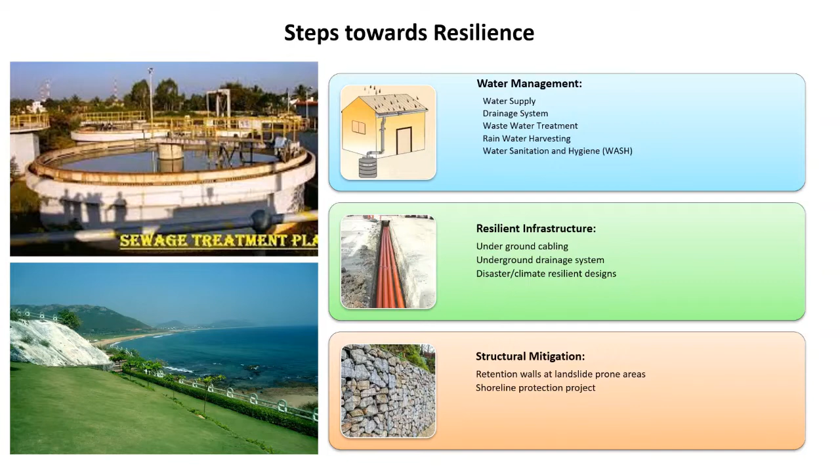The UNDP, GOI, and USAID projects were implemented mainly focusing on institutional strengthening, disaster preparedness and mitigation, climate risk management, and community resilience. Under these projects, hazard risk and vulnerability assessment studies were conducted.

Disaster management plans have been prepared and capacity building programs are also conducted. The City Operations Centre, established under the Smart City Mission, plays a key role in emergency management and supports the administration in real-time risk assessment and quick decision-making. The Engineering section, through Public Works and the World Bank's Disaster Recovery Project, covers post-disaster construction, recovery, and retrofitting activities.

We are happy to announce that in our city we have been able to maintain more than 30% green cover, in association with relevant departments like the Department of Horticulture, Forestry, Industries, NGOs, and the community, through various plantation and parks development.

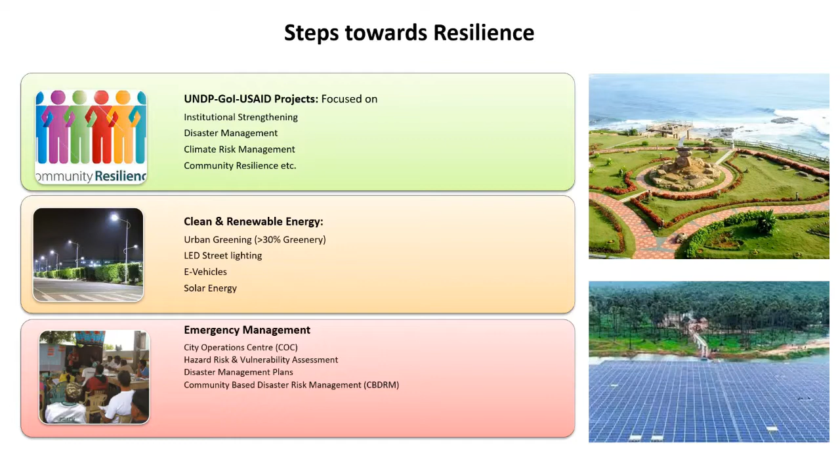Other prominent steps taken towards making the city climate resilient include LED street lighting as a model of energy conservation and efficiency, and e-vehicles deployed to reduce carbon footprint. Solar energy generation units are established on rooftops, parking spaces, etc. In fact, India's first floating solar plant was constructed at Mudasarlova Reservoir of Vishakhapatnam city.

For long-term sustainability of UNDP GOI projects, activities and city initiatives, the Sustainability and Resilience Program has been initiated by establishing a Sustainability and Resilience Unit under the Commissioner GVMC, Andhra Pradesh. The SRP and SRU will extend support to the entire state of Andhra Pradesh in association with national and international entities.

Objectives of SRP and SRU are to achieve comprehensive, sustainable and resilient development of Vishakhapatnam city, to support the state government in achieving sustainable development goals, institutional strengthening, and promoting better governance in the city, and to implement policies, frameworks and best practices laid out by the government.

The Sustainability and Resilience Unit works directly through its four cells: environmental cell, climate cell, disaster management cell, and human resource development cell. Its components include planning and mainstreaming disaster risk reduction and climate change adaptation, implementation of sustainable development goals, environment management, climate risk management, disaster management, human resource development, research and innovation, development of an urban observatory, knowledge management, partnership, collaboration and convergence.

Climate cell activities include implementation of the climate change action plan, promotion of green growth, renewable and clean energy, climate change adaptation, awareness programs, health and well-being, and nature-based solutions.

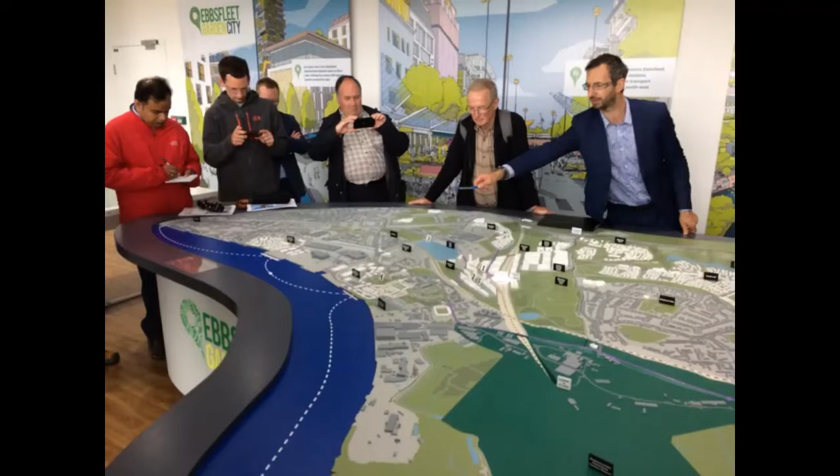They state in that implementation plan, waterscapes and green corridors are to be a defining feature of Ebbsfleet's streets, parks, and neighborhoods. In summary, the consortia developed and helped implement innovative strategies for managing urban water and flood risk as part of wider integrated urban planning to achieve environmental enhancement, urban renewal, and urban growth, in which the multiple co-benefits of blue-green cities can be both delivered and rigorously evaluated.

In 2020, the University of Nottingham appointed Dr. Liberty Mbanye to lead a new blue-green initiative in Nigeria, designed to find sustainable solutions to future flood and water resilience issues in Abuja. Dr. Mbanye will now tell you what happened next. Over to you, Dr. Mbanye.

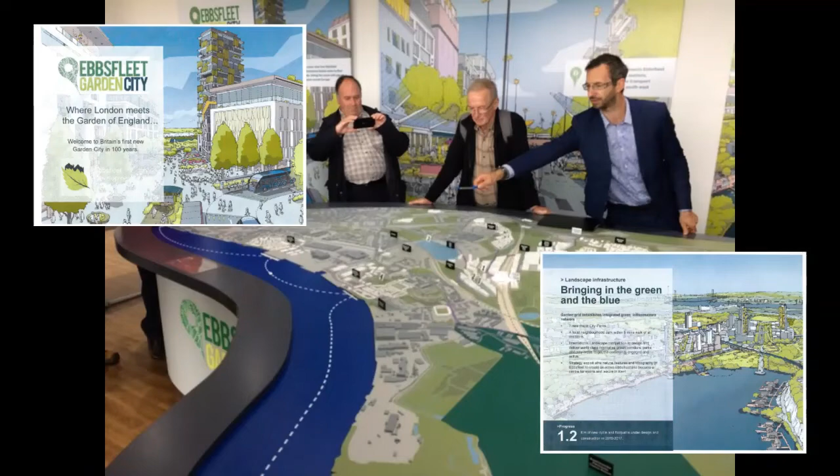Nigeria is building cities for the future like Abuja, which is justifiably referred to as heart of Nigeria, the center of unity, and whose master planning and philosophy envisages the nation's capital as providing a green, livable urban environment fit for the 21st century.

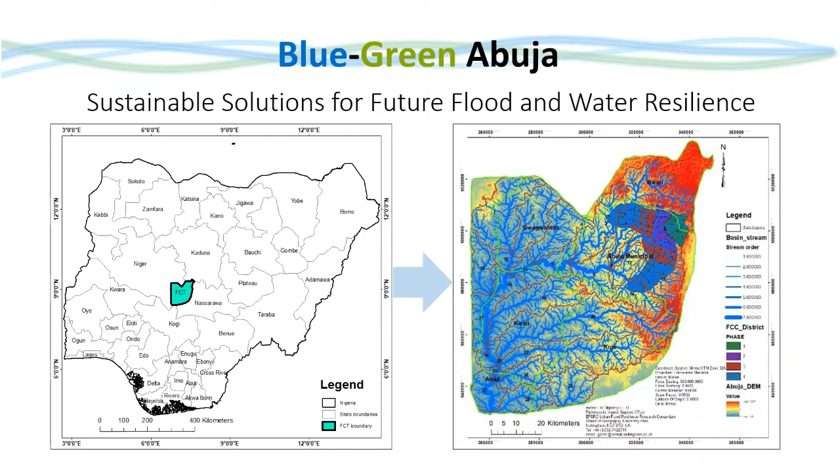The aim of Blue-Green Abuja, first, is to disseminate research and exchange practical knowledge about blue-green cities with urban planning decision makers and practitioners. Second, to build a network of academics in Nigerian and UK universities to teach and research about using blue-green and gray infrastructure. And third, to deliver a pilot housing project in a suitable area of Abuja that demonstrates the multiple benefits of integrated blue-green and gray infrastructure.

The core team I built is made up of early career Nigerian academics with a range of disciplinary specialization well suited to partnering with Abuja's flood and water management practitioners in delivering a blue-green future. They are Adedeji Aremu, Bashiru Shehu, Jonah Joshua, Liberty Mwanyi, Mercy Ade, Olamide Esho, Olumise Efebukan. The team appreciates and benefits from mentoring by Professor Thorne.

Arup is partnering with us in Blue Green Abuja. The firm is a collective with over 16,000 staff working across 140 countries. A primary goal of theirs is to develop sustainable cities while balancing the need of a growing world population with the finite resources and health of our planet. We share these core values and appreciate the experience and global reach that partnering with them brings to Blue Green Abuja.

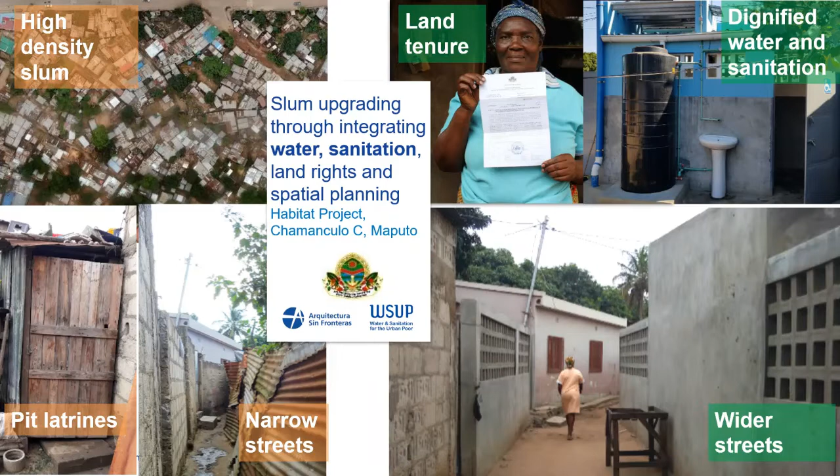I'm going to briefly describe the Chamanculo C Habitat Project. Chamanculo C is the name of a neighborhood, highly densified and grown informally, situated in the heart of Maputo city. Due to this informality, it faces several challenges that need to be urgently addressed in order to improve living conditions, especially now that climate change endangers the most vulnerable communities.

The physical patterns described by Eden and Mario are fully similar to what we have here in Maputo in our informal settlements. In the particular case of Chamanculo C, the main concerns are: we have too many narrow streets—in fact, we should not call them streets. They have undignified water and sanitation solutions, and there is a complete lack of tenure due to this informality.

As you can imagine, narrow streets hamper mobility and circulation, promote criminality particularly at night, and bring constraints to the provision of basic services such as water, electricity, and waste collection. Undignified water and sanitation solutions, mostly pit latrines, pollute soils and underground water, and expose our common spaghetti solution for water piping to the risk of contamination.

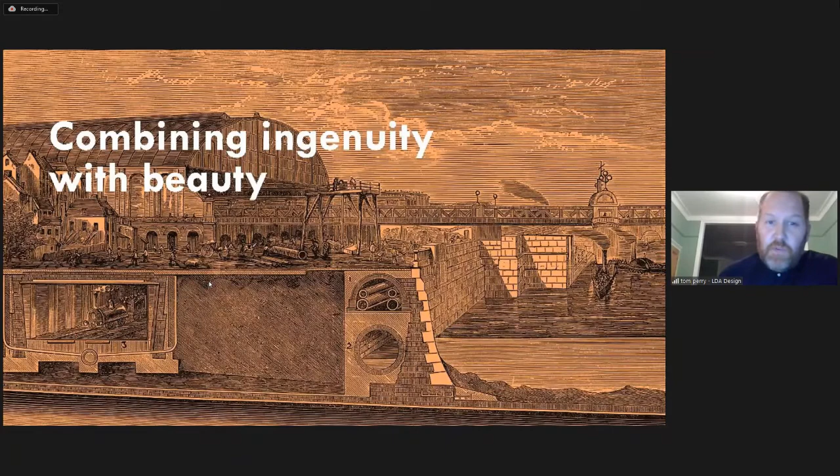I think we've been hearing a lot about the challenges and devastation caused by more erratic climate change. I believe we can confront these challenges by bringing different disciplines and stakeholders together and understanding the wider outcomes that can be achieved. We've inherited an engineering and design legacy that over generations has sought not just to solve a problem, but to create new opportunities. So 200 years ago, central London was transformed by infrastructure projects that sought to clean up our waterways, but they also enabled rail links and created new public green spaces in the heart of the city. By combining ingenuity with beauty in this way, a superior outcome was delivered, and this is the power of using design thinking and process to help solve our biggest challenges.

When LDA Design was brought in to create a new master plan for London's Olympic Park, the strategic aims went beyond regeneration. It was to give people living in East London the same chance of healthy living and prosperous lives as those in other parts of the city.

But the ambition was to use the park to stitch together the surrounding areas and become the focus for the wider community as well as the games. The landscape was what would connect people in place and build environmental and social resilience into the city.

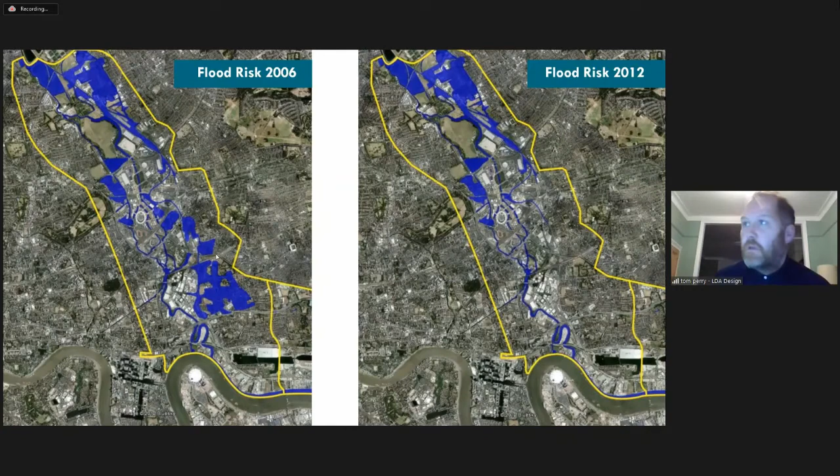The park naturally floods at times of heavy rainfall. The initial view was that this landscape would flood only in exceptional rainfall events, perhaps once every 10 years. In practice, it's now happening around 10 times a year.

But the park has also broken down boundaries. 38 bridges have helped to overcome the physical barriers. East London has been transformed by stitching together pedestrian and cycle networks. And there have been 39 million visitors in the 9 years following the Olympics.

And for me and my family who live on the edge of the park, it was critical to our mental and physical health during the last 18 months of repeated COVID lockdowns. The power of the park has always been in its social purpose, but London's Olympics demonstrates the impact of strategic, multidisciplinary thinking. This created value where there was none and created environmental and social resilience in a rapidly changing world.

Yogi. Thank you, Tom. It's great to be here today.

Thanks for having us. So working with many amazing local authorities delivering change on the ground, some commonalities of their challenges have become apparent. How do we make sure that local authorities can enable transformational projects like Tom's example, based on research and evidence aligned with climate action?

Understanding the barriers to enable meaningful change will be key. The biggest barriers are still siloed working and thinking, the lack of diversity, a massive gap of skilled workers to deliver on our climate targets, which is also an amazing employment opportunity, and the tensions between different well-intended policies that conflict on the ground. Diversity was identified as the most important aspect of collective intelligence.

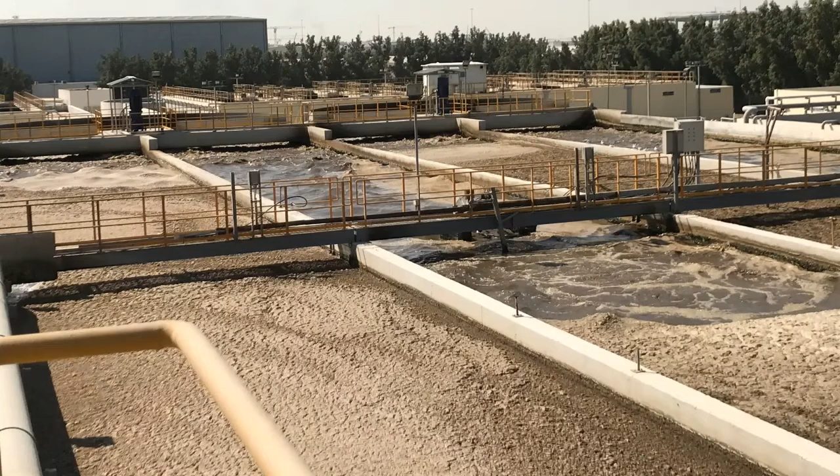We face water scarcity around the world, and we know more and more of the same is coming in the future. As officials in charge of securing water supplies in the cities look around, they find that one of the most reliable water resources these days are in the water treatment plants. So they realize that the treated water needs to be recycled and brought back to the city.

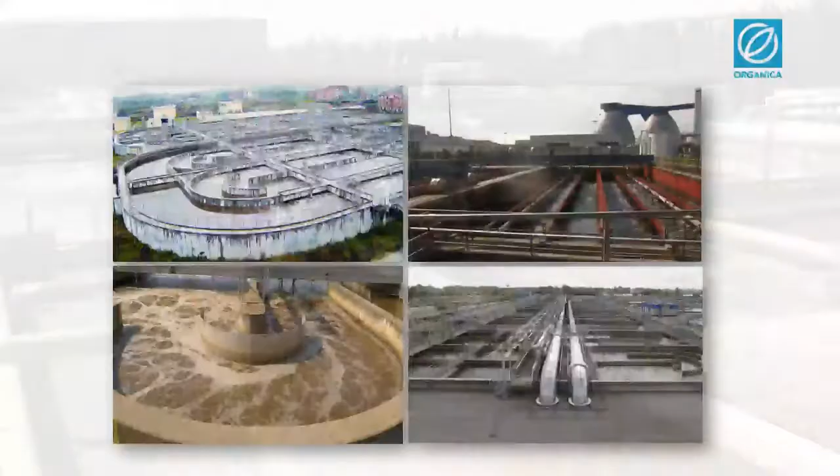What you see here are wastewater treatment plants built using different technologies. They differ in technological details, but share the same overall characteristics: they are large, they're smelly, and a little bit disgusting. This is why we build them outside the cities. The result is that we end up pumping the wastewater over long distances, and then pump the recycled water back again. But pumping water is very energy intensive and therefore has a large carbon footprint.

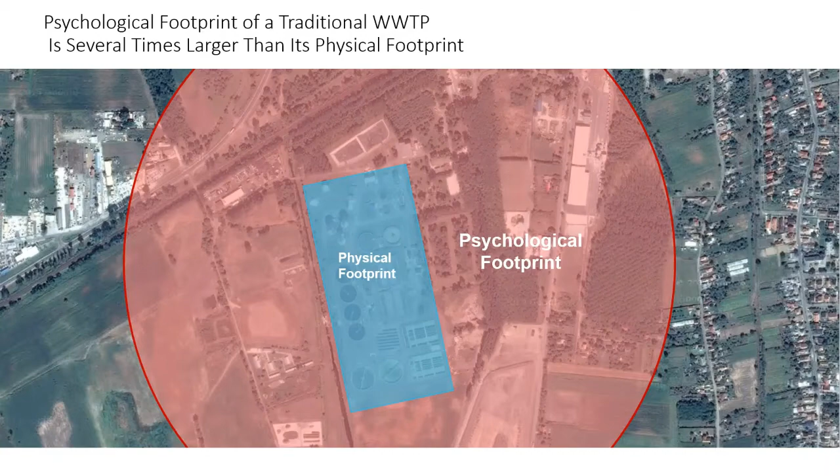So 23 years ago, we set out to develop something better that we can move into the city. But it's important to keep in mind that in addition to physical footprint, wastewater treatment plants also have a psychological footprint. You may ask, what is a psychological footprint? If I ask you how close you would buy a house to such a plant, what would be your answer? The answer is not the physical footprint, but the psychological footprint.

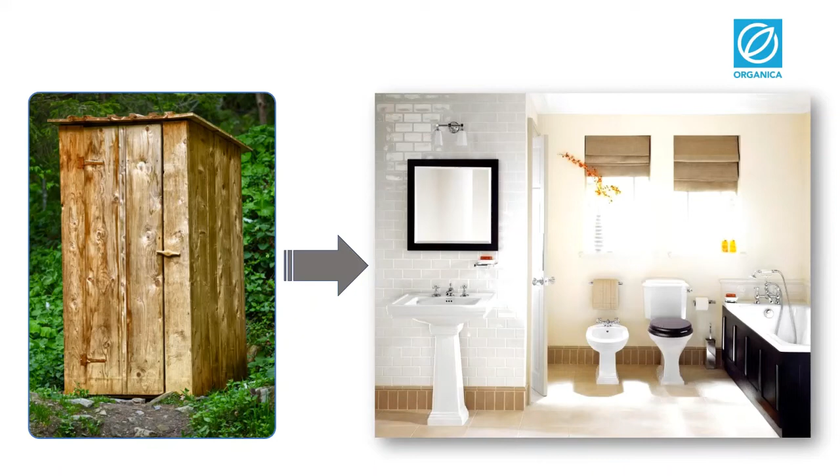So by the way, people invariably say as far as possible. We got our inspiration from the outhouse. The outhouse evolved into beautiful bathrooms close to our kitchens. So we thought that if that was possible, then we could turn the ugly, smelly, disgusting treatment plant into something much nicer. And as we thought about it, we realized they have to be much smaller, use less energy, be free of odor, and be aesthetic.

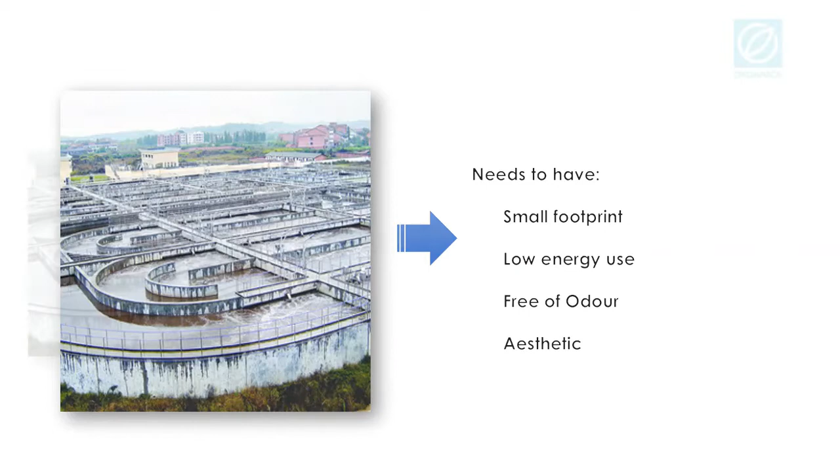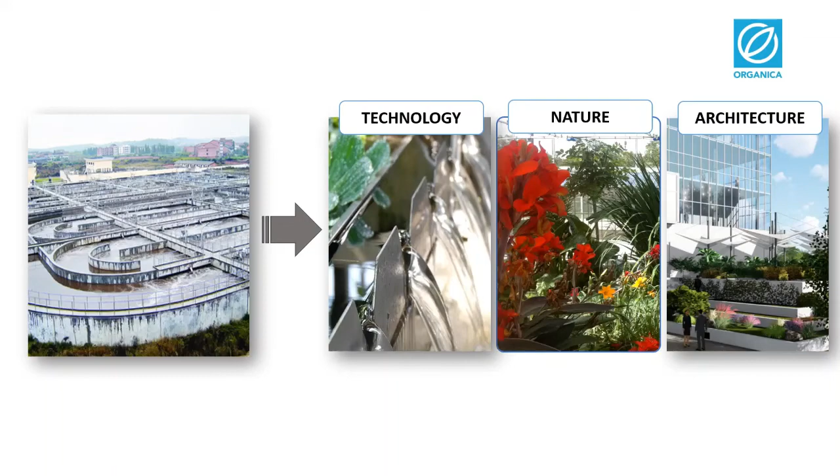So we identified three components: technology, nature, and architecture. We merged these three components to achieve this goal, and that gave rise to the water resource garden. Now, fast forward a few years, and what you see here are the facilities.

This is how they are built. They differ in capacity — some serve a few thousand people, some hundreds of thousands — but they share the same characteristics in that they are much smaller in footprint, lower in energy use, and have this botanical garden look and feel. Now, today, there are more than 120 plants in various stages around the world.

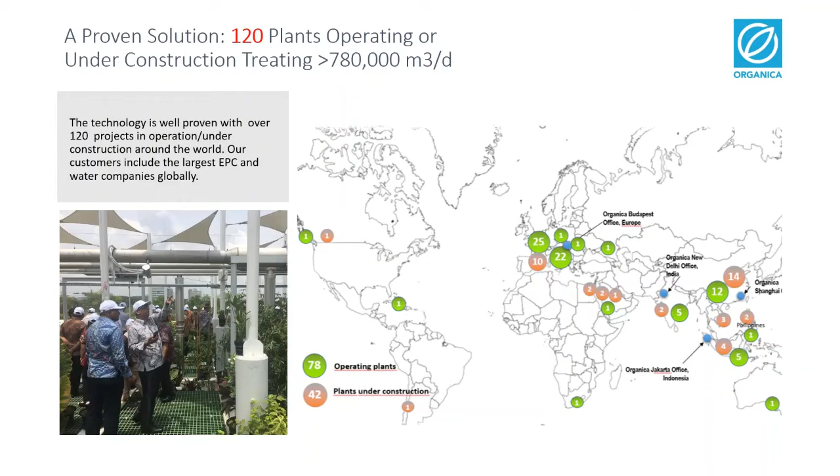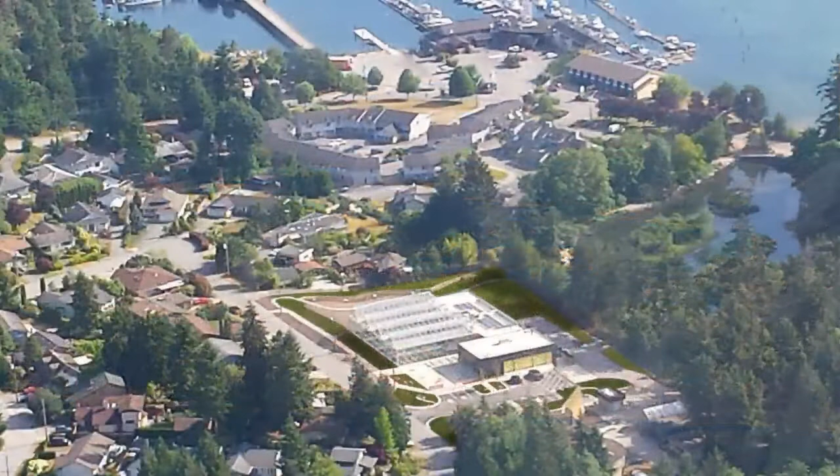I'm going to show you some examples of how they appear in the cities. The first one is in Canada, a suburb of Vancouver. Once the town officials realized that the wastewater treatment plant could be replaced by a water recycling garden, they decided to build it smack in the middle of town. You can see the marina on top of the slide and the greenhouse in the middle.

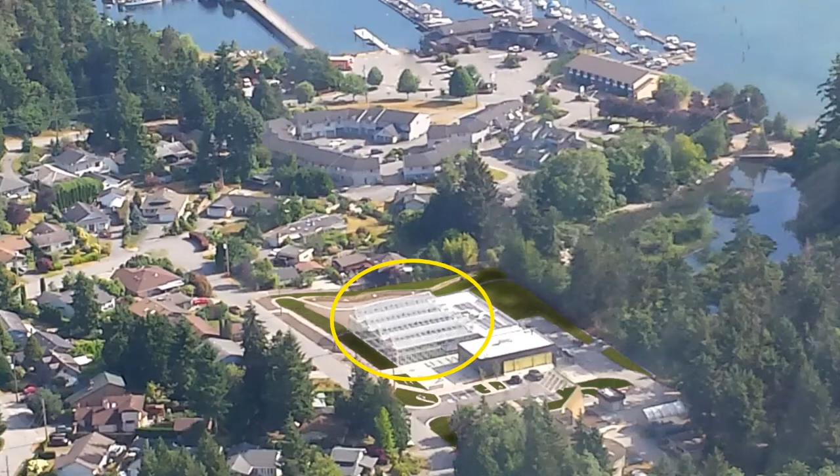The houses across the facility go for $200,000–300,000 each. And this treatment plant is not even called a wastewater treatment plant — it's called the Water Resource Center.

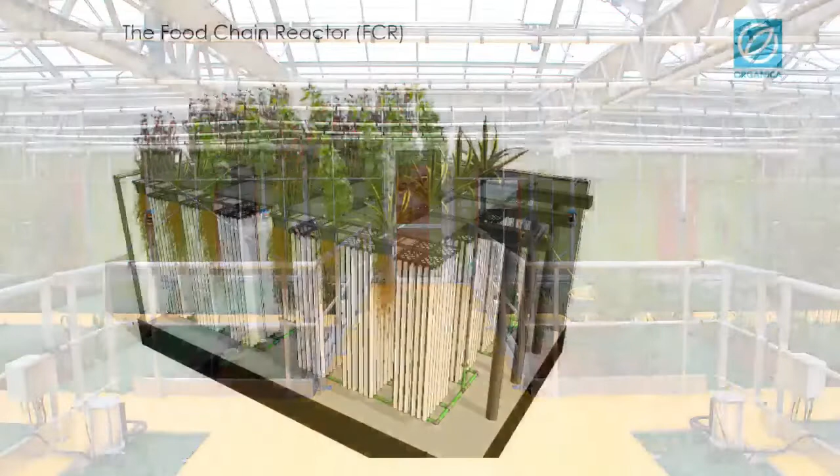The next picture is the first one we built in Hungary 11 years ago. Today, there are more than 30 such plants in Hungary alone. Under the green plants, there are 5-meter deep reactors where a combination of natural roots and these white things on the picture are engineered root systems that provide the habitat for a very wide range of biology. And these organisms feed on the content of the wastewater.

By this methodology, we create much higher biodiversity and much more biomass in the reactors. The solution can be applied not only for new plants, but older ones can be upgraded and turned into these gardens.

This 50-year-old plant, we were called in to increase capacity and improve treatment characteristics. And on a typical open day, there are over 2,000 visitors admiring the marvels of nature.

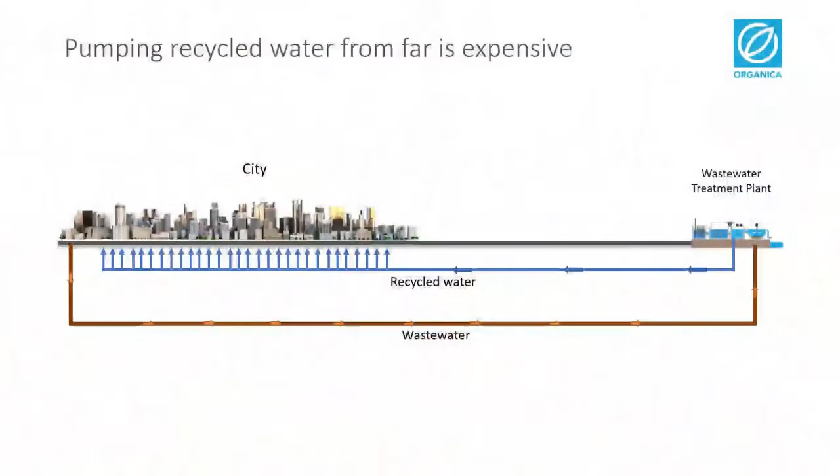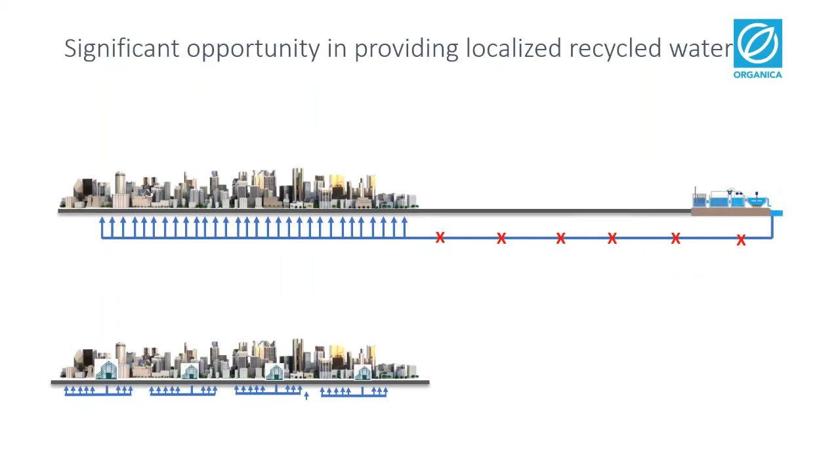My last example is in Shanghai. This 40-year-old plant that you see in yellow used to be outside the city, but over time it has been surrounded by residential development. And this is what people looked at from their living room, and this is what they smelled. We came in, increased treatment characteristics, and this is what it turned out to be. You can see the interiors, the exterior, and you can see how this eyesore became a feature of the neighborhood.

Thank you very much for your attention.

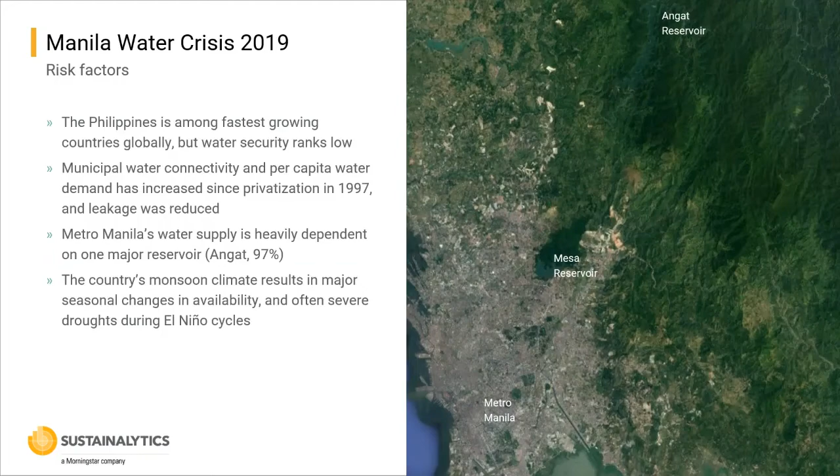Overall, this meant that there's very limited water supply, which can fluctuate from year to year, and a steadily growing demand. The two water companies that operate water concessions are Manila Water Co. and Maynilad Water Services, which serve the east and west parts of the city, respectively.

Metropolitan Water and Sewerage System is a government agency, and it operated the whole system prior to privatization, and it still has a regulatory role as well as a role in securing new water supplies. So 2019 was a very dry year, and Manila Water was already supplying more demand than their allocated water. And so they resorted to drawing down the reservoir at La Mesa and used almost all the water there before the dry season had really fully started.

So throughout the summer, millions of residents faced low water pressure, limited or intermittent supply, and really had to resort to getting water from trucks and other really problematic situations, especially for the poor. And so some water was shared from the other concession, but even still there was problems.

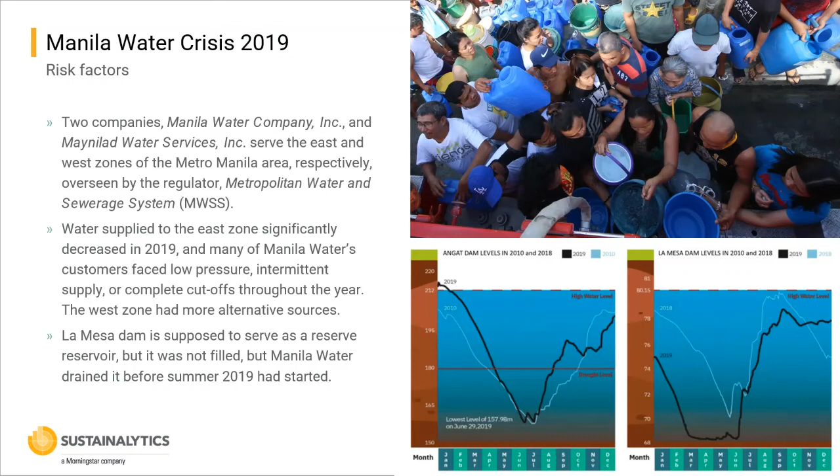And certainly there was some technical and logistical problems. For example, some of the intake gates at La Mesa Dam were too high to draw water properly from the lower levels from the aqueducts. There was a big delay in construction in one of the new water treatment plants, and certainly rationing earlier could have softened the crisis. However, there's a growing consensus that the main cause is sort of a supply and demand problem and that new water sources are required.

So the crisis has spurred approvals for several large water projects. One of the central issues is that the development of new water supplies has been delayed for a long time for several reasons. There's no single party that is solely responsible. The water utilities did apply to build some and did, but others were turned down for being too expensive.

The largest project, the new Centennial Water Source project, has been on the table for decades, but it's been held up for approvals and financing issues. It's also controversial as it will flood natural areas and displace indigenous groups, and it's expensive, involving a 23-kilometer tunnel under a mountain range. So various incarnations of this project have come and gone over the years, often to be shelved by the incoming government.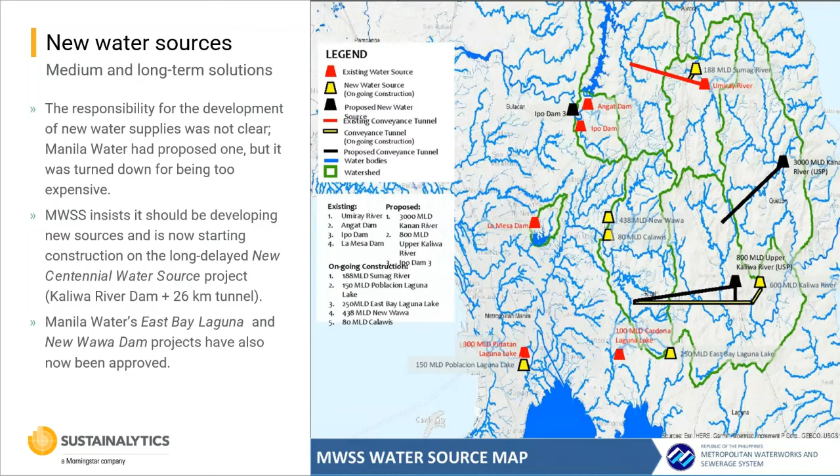Several short and medium-term projects have also been approved, including one that had previously been rejected for being too expensive, as it relies on advanced water treatment to draw water from Laguna Lake, which has turbidity and pollution issues there.

So what can we take away from this? I think it very clearly underscores the importance of having really well-defined roles for regulators, utilities, government agencies in terms of developing projects. There's definitely a lack of clarity and planning in the long term for demand growth and mitigation. So this is a real key point. Climate change was only a minor point here, but it certainly will be a factor going forward globally, especially in places that are monsoon climates. So that has to be modeled in.

There's a lot of water that can be saved from reducing non-revenue water. Initially, that probably delayed some of the requirements for new resources. And finally, really big projects can take a long time to develop and can face political interference. So having a diversity of smaller projects tends to move things along better and may even render larger projects unnecessary.